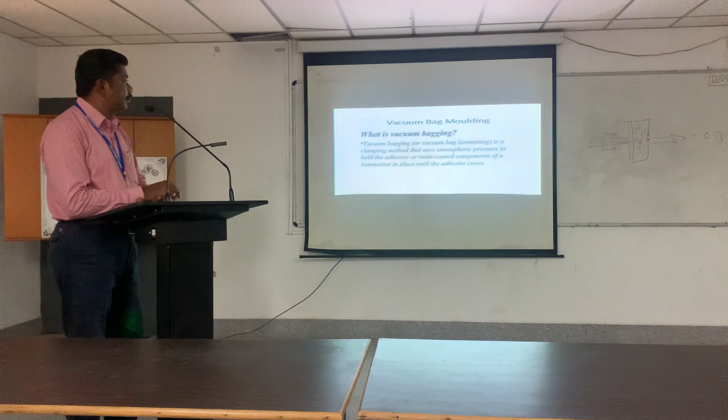Vacuum bagging is a clamping method that uses the atmospheric pressure. That is, to use the atmospheric pressure, vacuum pressure will be used to hold the adhesives or resin coated components of a lamination in place until the adhesive cures.

So there are varieties of vacuum bag molding diagrams. Just if you Google it, there are a number of diagrams. These are the diagrams which I have taken from Google only. I have not created them on my own. There are a number of diagrams.

Here, each and every process has been developed after one process to rectify the problems that occurred in the earlier process. So there are some problems in the case of the hand layup method. Just now we have seen hand layup and spray up method. There are some disadvantages and problems we have listed. Listen, what are the problems?

Labor intensive, consistency will not be there. Fiber length will be short, sir. Fiber length will be very short in the case of spray up. And one more problem which we have not discussed in the hand layup method is, you cannot increase the fiber volume fraction higher in the case of hand layup method.

So if you are stacking 10 layers of reinforcement, obviously you need to use 500 ml of matrix material. If it is slightly reduced, with the 7 or 8 layer itself, matrix will be over. Okay. So you cannot reduce the volume of matrix in the case of hand layup. Slightly more amount of matrix material may be needed in the case of hand layup method.

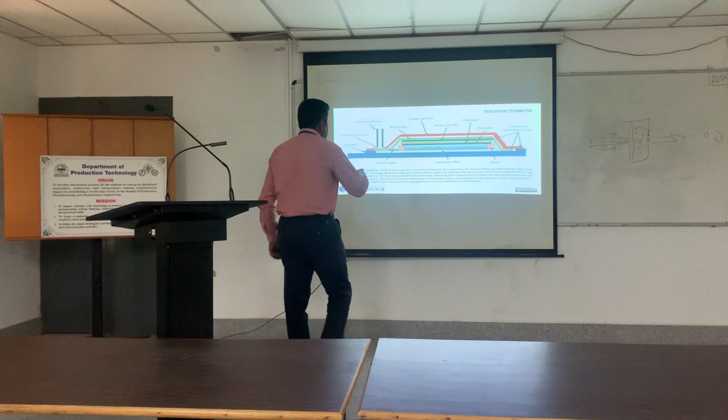This is the cut section of the process. This indicates the beading will be produced on the end, so the dam will be there. Here some volume fraction of matrix and volume fraction of reinforcement will be there in the laminate, along with the dam, along with the bottom plate. The bottom plate is called the mold pattern, on top of which, as I told you, is the release film.

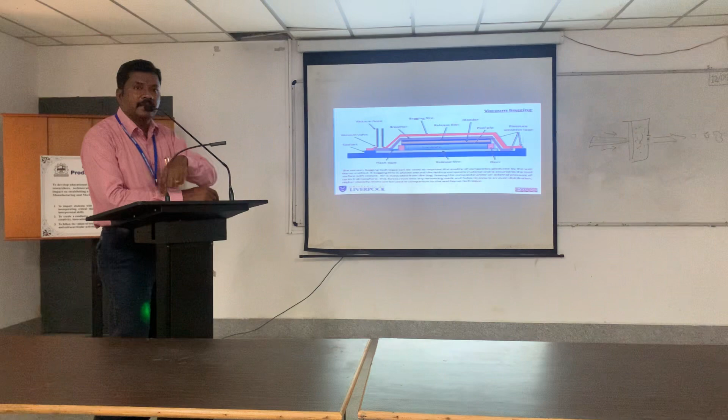Through that hole, the excess resin will come out. On top of which, a bleeder material should be placed over the entire area of the laminate. The bleeder material has to absorb more amount of resin or moisture.

That is the example what I quoted as it's only a cloth or sack piece. So this is the material, a cloth material or any kind of fabric material which will absorb more amount of resin. That layer is called as bleeder material. This will absorb up to certain amount.

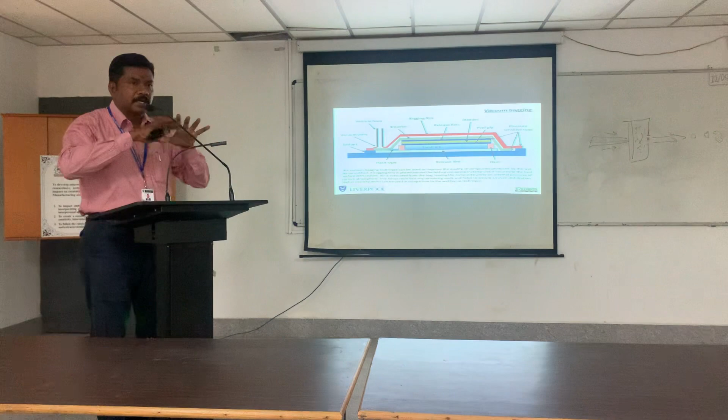Brick, normal refractory brick. That will absorb only lesser amount of it. So this will have smaller pores which will be in the zigzag form. And that will completely cover the entire mold with some pressure sensitive tapes. That means there will not be any leakages beyond this point, either liquid or air, like a complete cover. It will be completely sealed on the throat area.

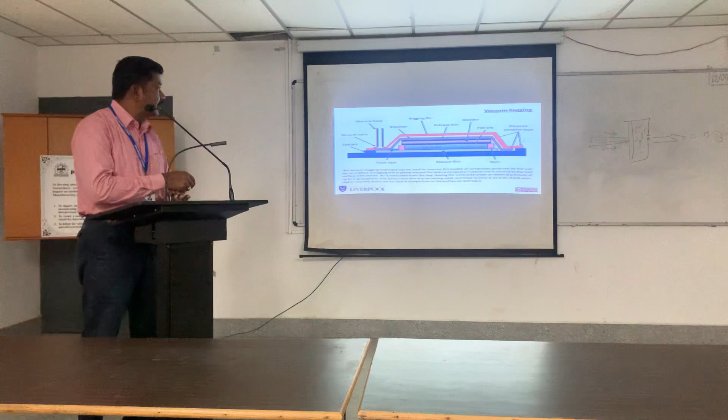On top of which this is the bagging film. On the top of the breather film, a complete bag will be placed. That is called as a bagging film. That will not have any holes, any pores. The bag will be completely closed on the entire part, and it will be completely sealed. It is a complete pore-free material. Whereas the breather film will have pores in zigzag.

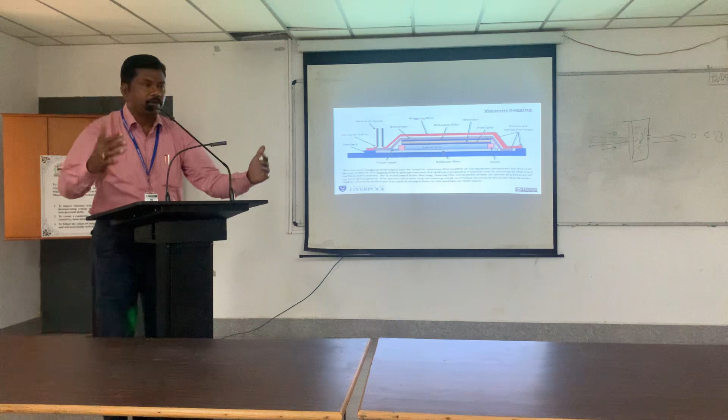Whereas the bagging film is a material which will not have any pores, like an MS sheet or aluminum sheet or plastic sheet. It will be completely covered on the mold and completely sealed. And through the bag, a hole will be made. This hole will be connected to a vacuum pump.

If the vacuum pump is switched on, what it will do? It will suck the air. During the suction of the air, if excess resin is there, through the zigzag holes of the breather film the excess resin will also come out. However much matrix material you need to extract from the laminate, that much time you need to switch on the vacuum pump, or the vacuum pressure should be selected.

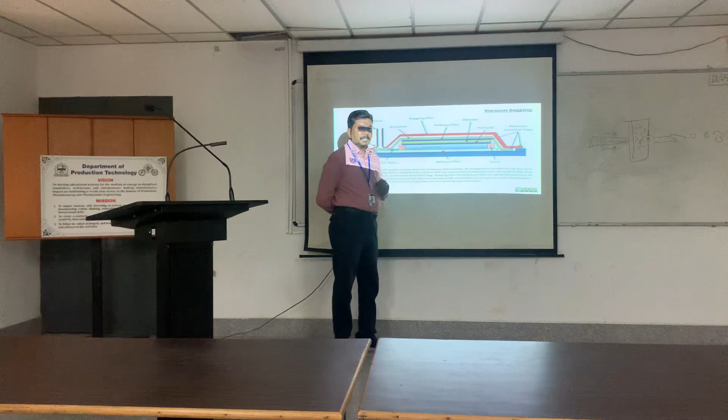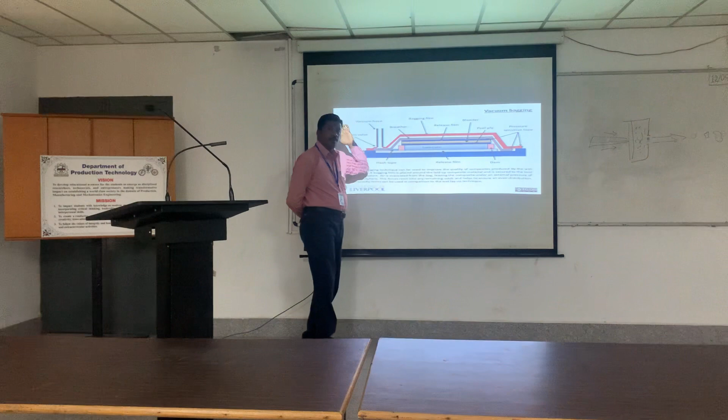Okay. Vacuum pressure should be selected. Why I told this is the material which is similar to that of a brick material in the sense, since the vacuum pump is connected, this bag is completely covered. The breather is completely covered and sealed. Okay. And they have made one hole. To improve the quality of the product, this hole will be made at n number of places. Finally, all the holes will be connected on a single line that will be connected to a vacuum pump.

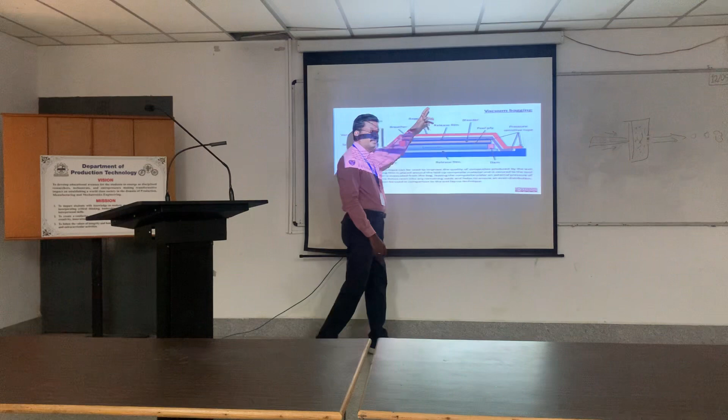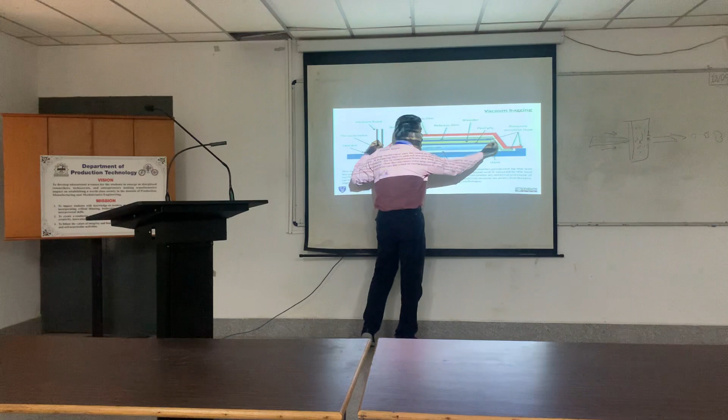Can you tell me the reason? So it's having holes. Here, this has been given that at only this point, the hole is connected. It has been connected to the vacuum pump. Okay. If the vacuum pump is switched on, it will try to suck. So whatever resin is present here, it is very easy to suck through this hole and it will come out. Isn't it?

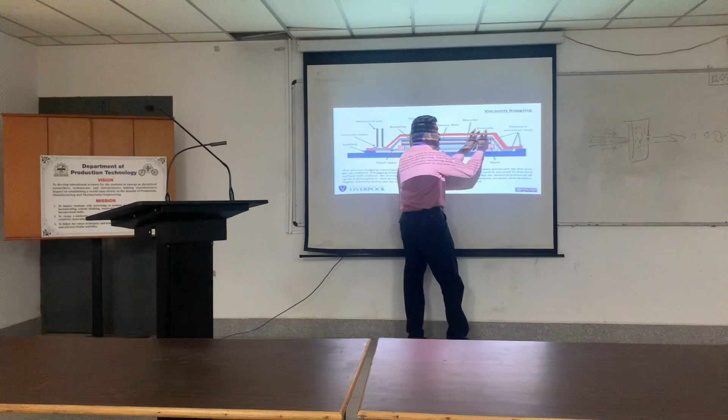That is why to improve the quality of the product, what they will do, here one hole, another hole, a number of holes they will make and finally connect all the holes, then they will make the common vacuum bag. In all the cases, uniformly that will suck. Okay. If you make only one point for this vacuum pump, more suction will be from this side, or from this area more matrix material will be sucked.

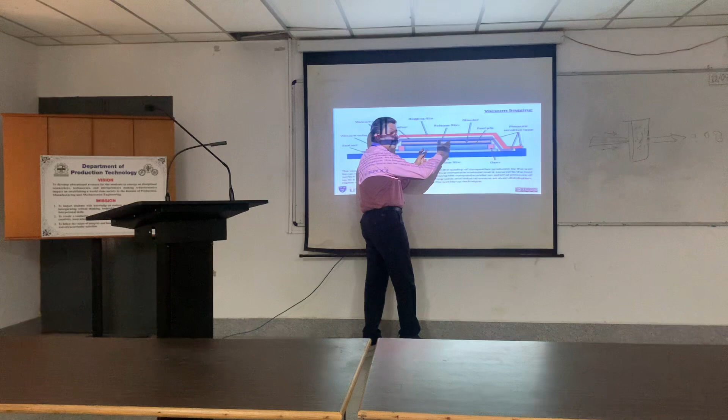So through this area, matrix volume will be somewhat lesser. Through these areas in the laminate, matrix volume will be slightly higher. Non-uniform extraction of the matrix material from the laminate will be there if you provide only one hole. Okay. These are all the ways for improving the quality of the laminate by vacuum bag molding.

Okay. So that is why this breather film is also quoted as like a brick material, which will have zigzag holes. It will not be very easy to extract the matrix material. Through those zigzag holes, the excess resin has to come out. So more of the matrix material will be absorbed by the first layer itself, the bleeder layer. That is why this is called a bleeder. Bleeder means bleed out the excess. So that is why this is called a bleeder film.

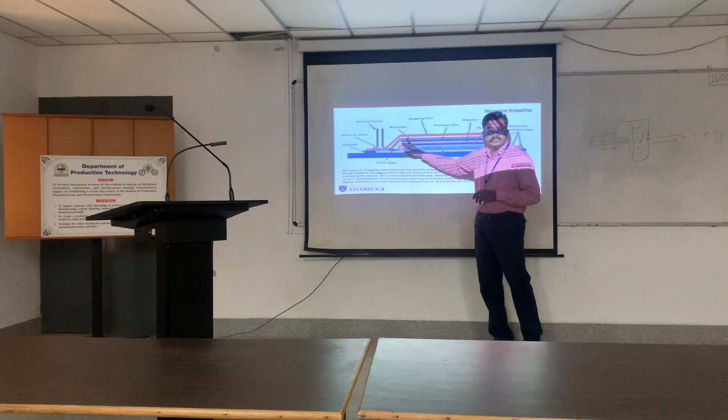Whereas the breather film will absorb only a lesser amount. Okay. In a slightly tougher situation, that is by overcoming the zigzag path, this will absorb some amount of moisture or the matrix material. Breather, so a smaller amount. So the film which separates the breather film and the bleeder film is called the perforated release film, but technically that is called a barrier film.

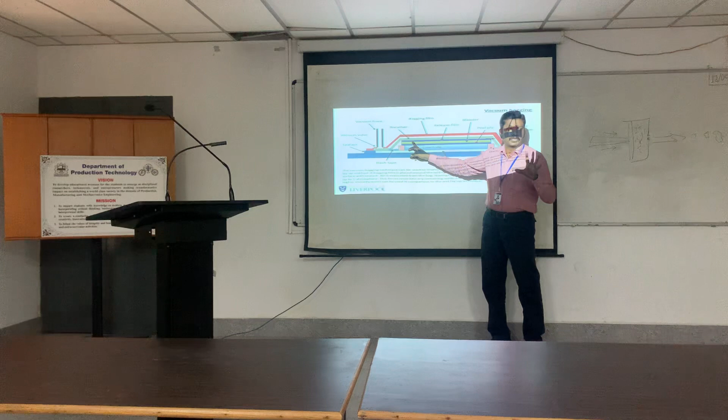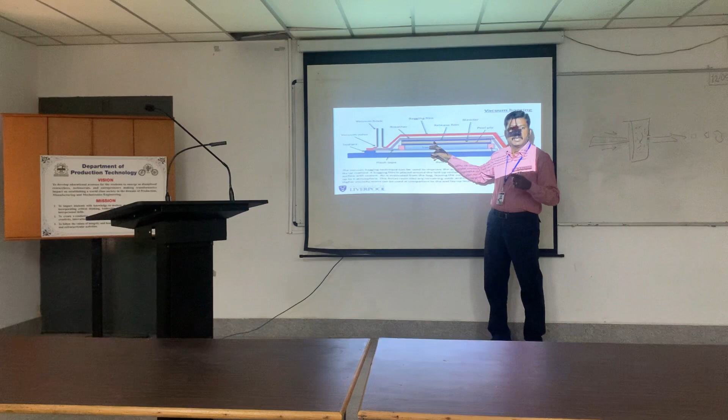Okay. So in the case of vacuum bag molding, what are the two layers which absorb more matrix? The bleeder and the breather. Only these two layers will absorb more moisture, more matrix material. Accordingly the quality of the laminate will be good, isn't it? So this is the layer which separates the two main layers of the vacuum bag molding. This layer is called the barrier film, which separates the bleeder layer and the breather layer.

So this layer you can mention as barrier film, and this is the perforated release film. Don't put it as a peel film. Okay, perforated release film, and this is the simple release film. Okay, so these are all the layers. Each and every layer you need to write, and you need to write about the functions of each layer. What is the purpose of the release film? What is the purpose of the perforated release film? What is the purpose of the bleeder?

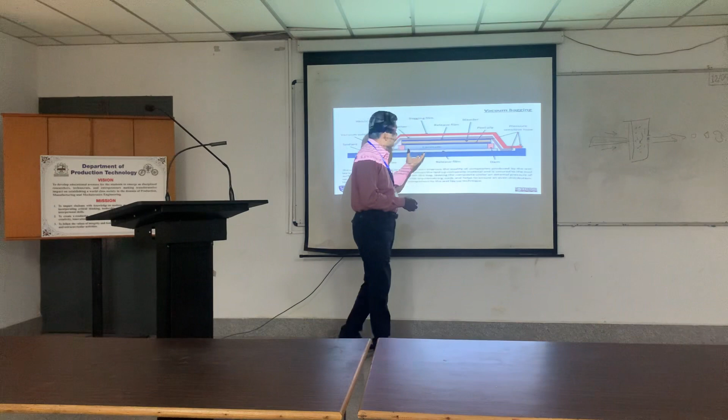What materials will normally be used in the bleeder, what is the purpose of the intermediate layer, the barrier film, and what is the purpose of the breather, which will give uniform absorption of the matrix material, and which will be used to give uniform vacuum pressure on all the areas.

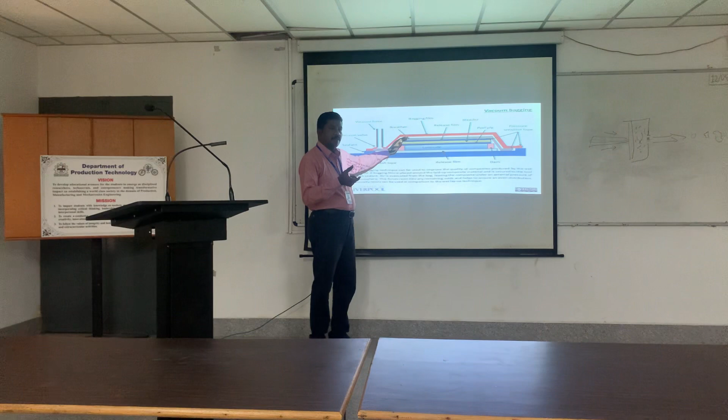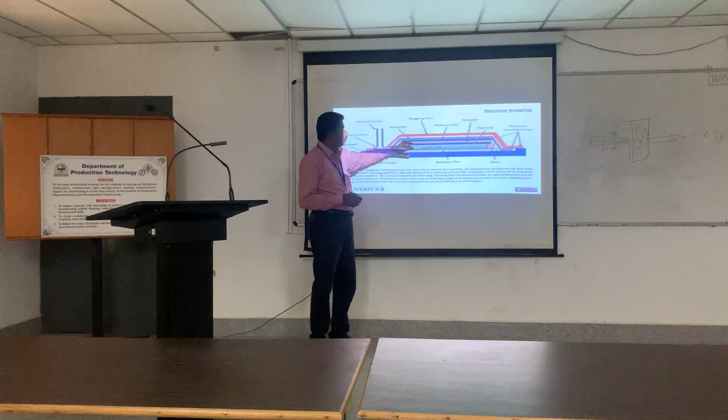Instead of a brick-like ceramic material, if you had selected a cloth material, even some thicker cloth materials will have a zigzag path. Okay. If it is a thin cloth material, more suction will be on only one part. So even if you provide holes at n number of places, at the exact point of the hole you should not suck more matrix. It has to be spread over some area.

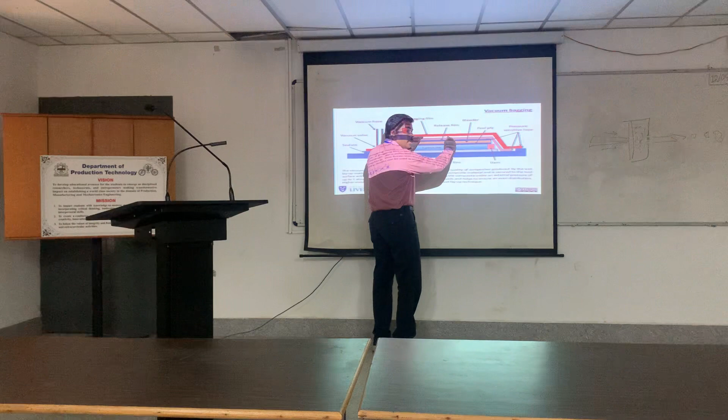So for this the breather film will be used. Okay. To distribute the vacuum pressure to the nearby areas, the breather film will be used. And the final film is the vacuum film, which will not have any holes. If it has any kind of holes, what will happen?

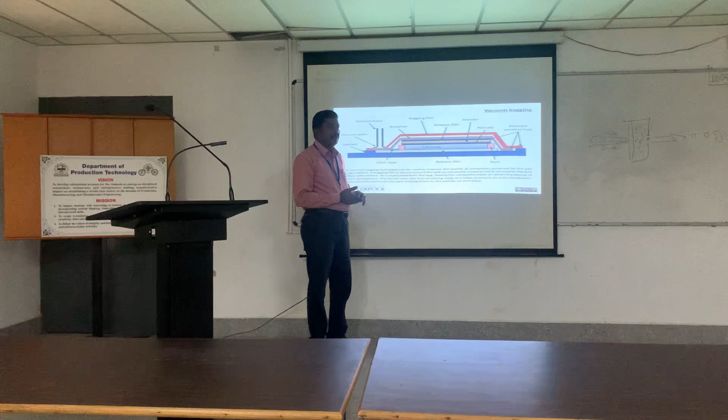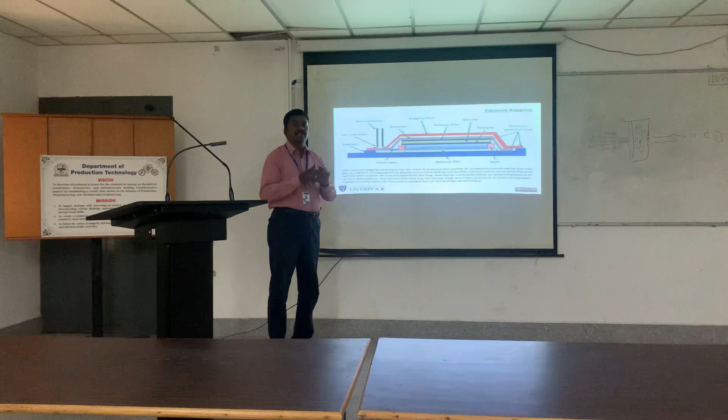Okay. So this should be a pore-free bag. That is a pore-free bag. This bagging film is a pore-free bag that should completely cover the entire laminate with the mastic sealant. Okay. With the proper sealant.

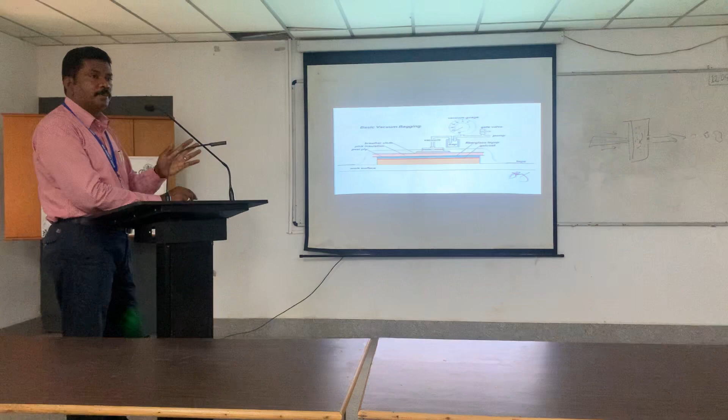This is another. Here they have mentioned these layers. This is another diagram. There are a number of diagrams. Okay. The only thing is you need to understand the purpose of each and every layer. You can construct your own diagram and you can explain. It is not necessary that you draw the diagram similar to what is available in the textbook or the net. Okay. Your diagram should emphasize all the functions of the layers.

Okay. First one is the bottom mold, then release film, then the laminate, covered with the dam material, beading material, on top of which perforated release film, which will have bigger size holes, then on top of which bleeder film, which is like a cloth material that will absorb more moisture or more matrix, then on top of which again one more perforated release film, called the barrier film, which will have holes smaller in size, higher in numbers.

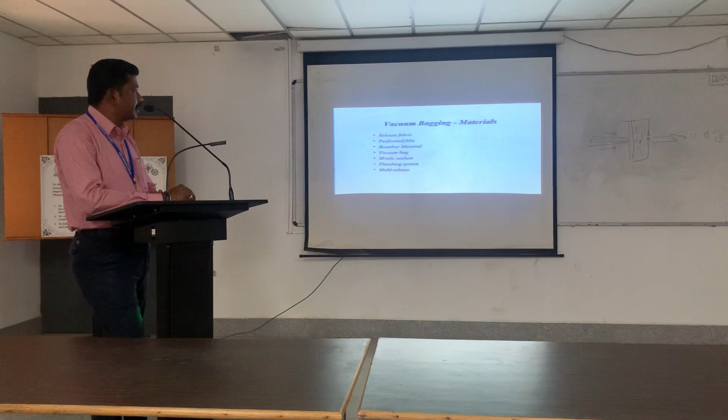Okay. You can see the components in vacuum bag molding: release fabric, perforated film, breather material, vacuum bag, mastic sealant, then finally plumbing pipeline and the plumbing systems. Release fabric is called a release film. Okay. A smooth woven fabric, not bonding to epoxy, not bonding to any kind of matrix.

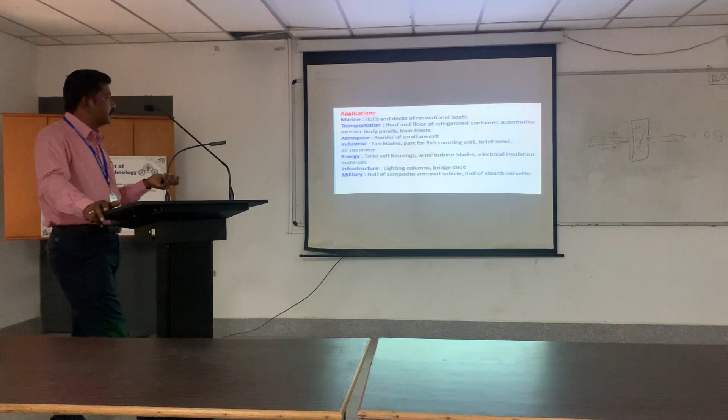Transportation, roofs and floors of refrigerated containers, automobile, aerospace, industrial, etc. Energy, infrastructure; in almost all applications vacuum bag molding is used. If you look at a sporty bike, the fenders, front shield, everything is made by vacuum bag molding. That gives a pore-free, smooth finished, aesthetic-looking component. That is why they go for this kind of vacuum bag molding.

That's all about vacuum bag molding. Do you have any doubts on vacuum bag molding? You need to draw a diagram and list out what the layers are.